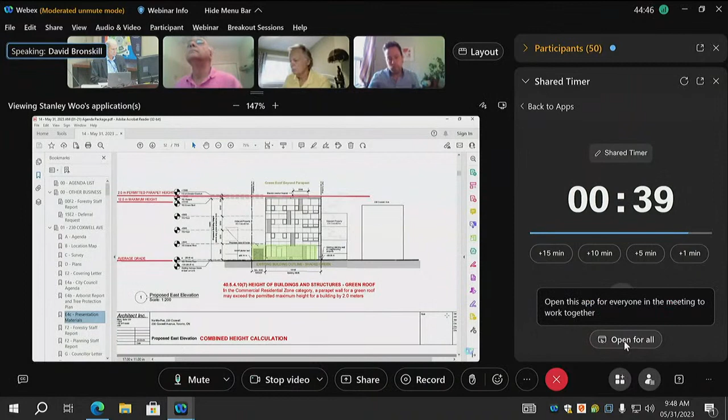There is a height variance. We think it's in keeping with what's existing on the street. We're simply noting that although there's a maximum permitted height of 12 meters and we're exceeding that, going up to 13.26, you can see there's a parapet height projection permitted for 2 meters. So in fact the street wall could be up to 14 meters. We are below that, and we are providing a green roof. So in terms of that overall height...

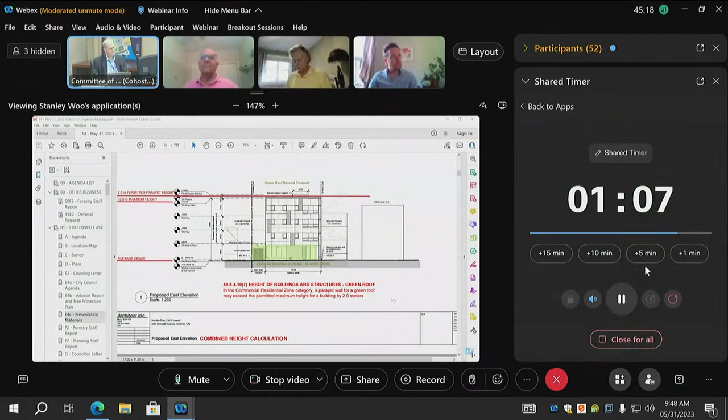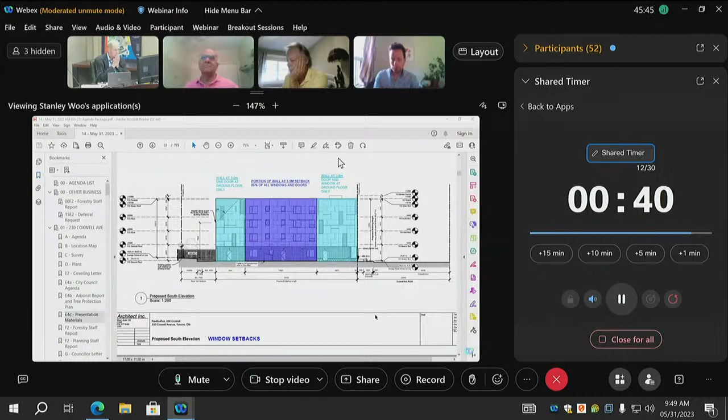The next page, page 6, shows another one of the technical variances. You're supposed to have a 5.5 meter setback on a wall where there are windows. Page 6 in dark blue shows the area set back 5.5 meters that has windows. The light blue is set back 3 meters, but on the left-hand side there's only a door, so no windows on the ground floor, and on the right-hand side a door and a window at the ground floor. So again, we think the intent of this provision is being met.

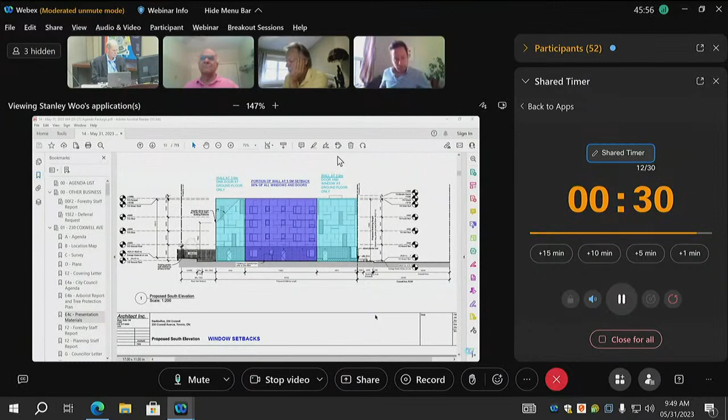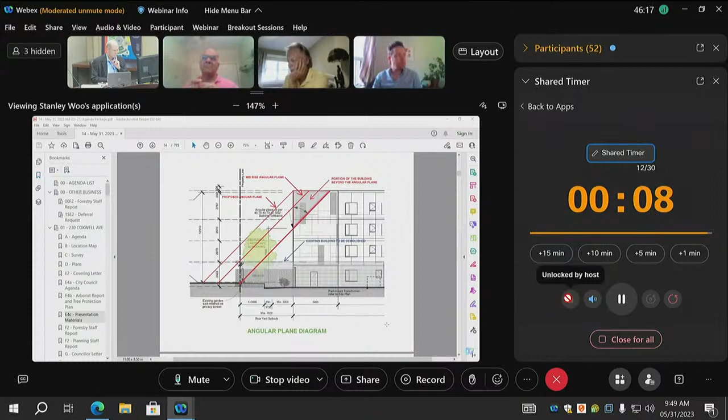Finally, Mr. Chair, page 7, we're showing an angular plane diagram for the committee. We have a penetration there in the dark gray. I wanted to draw your attention to the middle red line that we drew on this. That's not a zoning standard, that's the existing mid-rise angular plane. So when you're doing a mid-rise building on major streets, that red line is what you're supposed to meet. We know that angular plane is in fact being taken away through recent city staff initiatives, but you can see the small extent of penetration into a very standard urban design guideline for angular planes. Thank you.

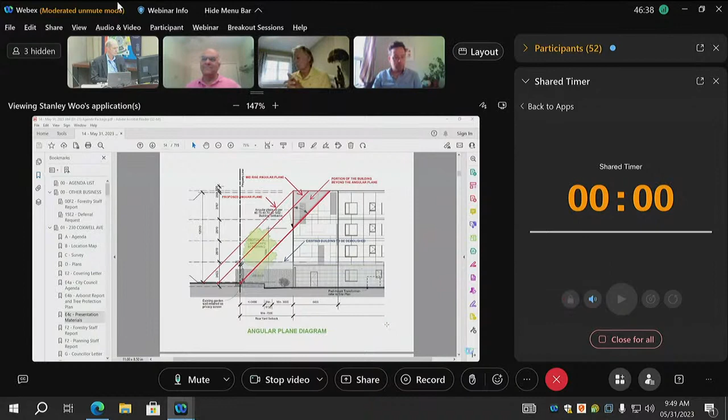Okay, thank you. Panel members, I gave that speaker an extra minute because we have 10 speakers registered to speak in opposition, so I just wanted to get as good a picture of the application as I could. Are there any questions for the applicant or the agent at this stage, panel, or shall we go ahead and hear from those in opposition?

Let's go ahead to the first opposition speaker. We'll ask the opposition speakers, because there are a number of you, to please be careful not to repeat what those before you have said. There's no need for that. But we are interested in how the application concerns you and the impacts you see it having upon the neighborhood and upon those like yourselves who live nearby.

First speaker, moderator. Hi, Shu. You've been unmuted, and you can turn on your video if you want. Before you start, hello everyone, can you guys all hear me? I beg your pardon, your voice is a bit faint. Can you all hear me? You're faint, no, we're having trouble.

Can you guys hear me? Hello? We can hear her, Chair. Hear him, Chair. Now we hear you here also. Good, okay, okay, so I'm clear, you guys can hear me. You're clear, okay, and now you're loud. Yes. Okay Stanley, could you share my material on the screen? I just need the first page before you start counting. Yes, that's the one. Okay, can I start? Please go ahead.

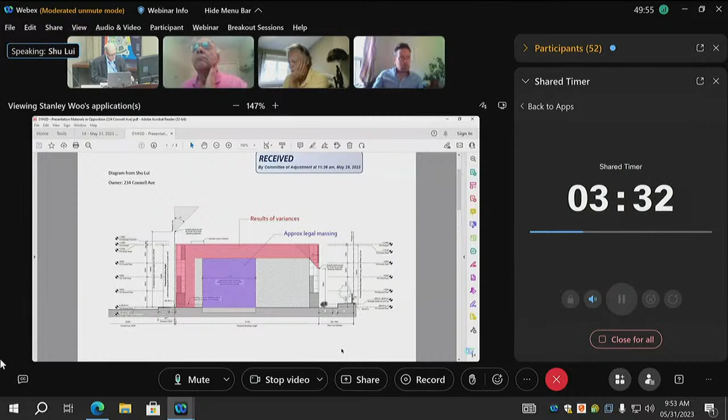Number two, fire hazard. Since I have 5 vents on the southern wall, 3 dryer vents and 2 kitchen vents, they have no respect for any setback between my building and the front. Therefore, as a result, those vents will stop working, and I won't be able to maintain them. All the residents in my building will be at risk of carbon monoxide poisoning, as well as risk of fire for both of our buildings.

Number 3 is structural integrity and accountability in the long term. As the geotechnical report states, it will be extremely difficult to build this close to my building, and the soil condition won't be able to support their 4-story building with conventional construction. This is no news to me, because if you live in the neighborhood and know it, this intersection has been troubled by foundation and structural issues due to the soil condition.

For example, up the street, the No Frills and GoodLife Fitness both have had structural issues in the past and recently. No Frills was a bit extreme, they had to be completely demolished and reconstructed because the building was basically collapsing on itself after some time. So this tends to happen to denser buildings, and that's all we know, imagine what we don't know. I think in this intersection, any building asking for variance, adding weight and density to their building, should be automatically refused, especially when it's this close to my building.

If something happens, I'm going to be dragged with it in the short and long run. So the last item would be my airflow and views will also be impacted.

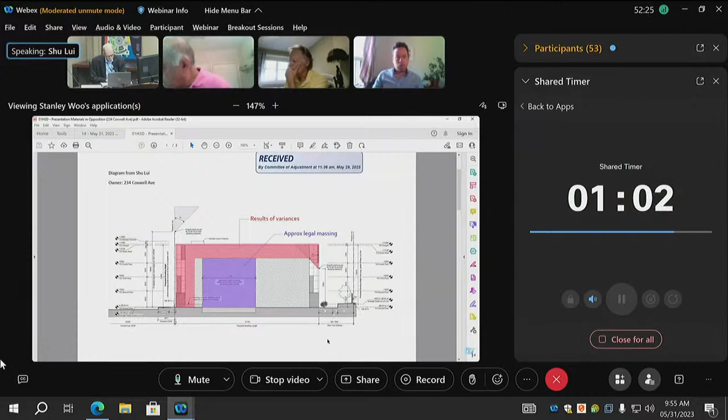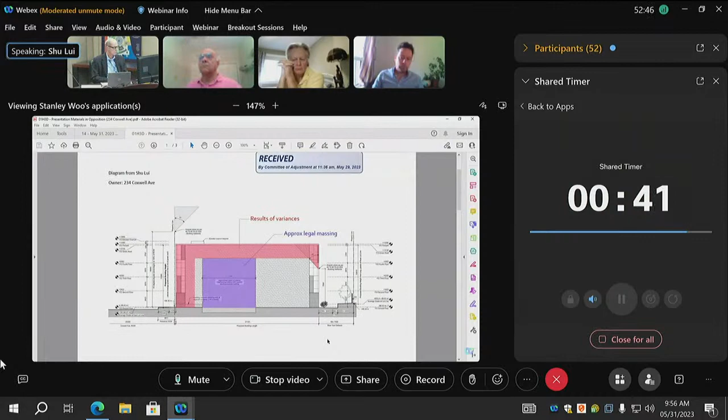A few days later, they called me and told me they don't care about my concerns. Not only that, they are asking me to completely reroute my internal ducts and vents to suit their variances in design, which I think is absolutely unacceptable. This is disgusting. I hope the panel can see that their marketing material, and what their friends say about them, promotes them as neighborly, responsible, and collaborative. But when you look at their actions, they have been completely the opposite — aggressive, irresponsible, and dishonest.

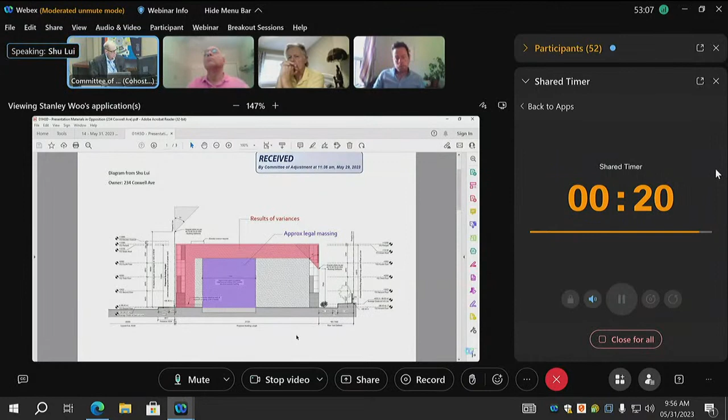I hope the panel can judge this proposal by what they do, not by what they say or what their friends say about them. I don't want this to degenerate into a personality issue — we're dealing with the variances in the application. So I'm brief here, but I have stated in detail in my letter why I think these variances should be refused.

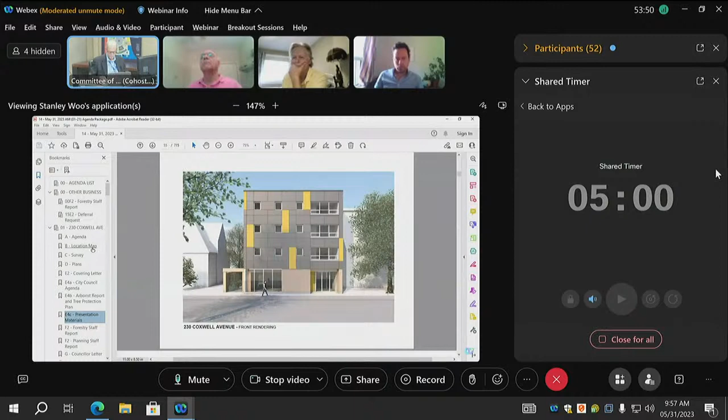Hi Abbas, you've been unmuted. Thank you, can everyone hear me? We hear you clearly — you have 5 minutes to present your concerns. Tell us about the impact you're concerned about. Thank you. My name is Abbas Asuji, and I'm a resident of 234 Coxwell, the property directly adjacent to the variances being requested today.

Affordable housing is undeniably an issue in our city, and I fully acknowledge the importance of addressing it. However, I firmly believe that any development, including this one, must be thoroughly thought out and involve meaningful consultation with the immediate neighbors. Minor variances, especially bundled in the quantity requested today, can completely change the scale of the development and cause permanent consequences for those living in close proximity.

Today I want to bring your attention to the glaring lack of consultation and the hasty variance request process for this development. I was surprised that only on May 7th were we made aware of this development, through a letter from the city. As someone living right next to this property, this shows a very clear lack of early engagement. Usually with such developments, developers give significant notice to avoid these types of surprises. It is normal for developers to consult with neighbors well in advance so they can understand and evaluate the potential impacts on the neighborhood. But this clearly wasn't done in this case.

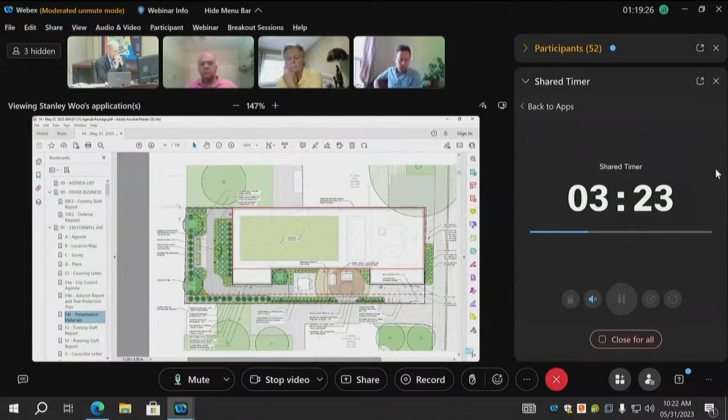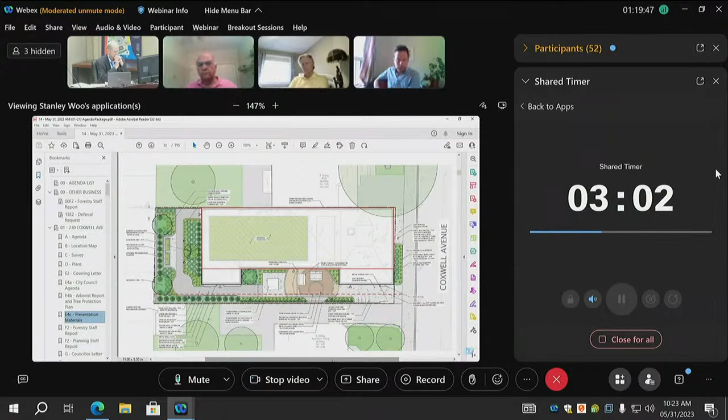In terms of how the building will function, there were some comments about that. If staff could pull up page 3, the colored landscape plan — you can see the 3-meter setback to the front portion of the buildings on the side to allow the pedestrian walkway, where there's only the door and window at grade. Then the 5.5-meter inset, where there are windows in accordance with the zoning bylaw, and the bump out again at 3 meters where there's just a door. There's a landscaping strip to the property to the south, and a 0-meter setback to the building to the north. I'll speak about the vents in a moment. It's a very well designed and coordinated site plan with landscaping buffers, particularly to the property to the south.

The next page shows the ground floor plan, since there was a question about managing traffic to the building. In terms of pedestrian traffic, it's managed as any other residential building is managed — there's an entry vestibule, a main entrance, a lobby, stairs and elevators, and residential units that people will live in. So I'm not quite sure what that speaker was suggesting in terms of managing the occupants. They are residents of this building the way any other person is a resident of a building in the city of Toronto.

There was a concern about bicycle parking. You'll note on this plan at the bottom left, the bicycle parking room. The variance before you doesn't relate to the amount of bicycle parking — it relates to how they are stacked, i.e., whether or not there's a mechanical device used with stacked bicycle parking spaces. So there is bicycle parking.

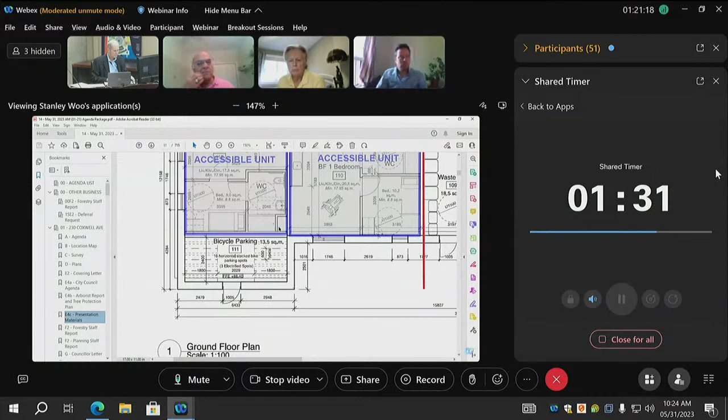Let's just zoom in on that for a second. Okay, there it is — 16 horizontal stacked bike parking spaces, 3 electrified spots in a bike room. The amount of bicycle parking is as required under the zoning bylaw; it's just that the stacking doesn't have a mechanical stacker. So it's a very technical variance, and I would hope in a building that's going to be affordable housing, that's an area where we might have some flexibility.

There was a question about garbage. If staff could scroll a little to the right, you'll see the waste room that would store the garbage the way any other apartment building would have waste stored inside.

It could then be brought out to the curb through that pedestrian walkway that I showed you earlier on the landscape plan, out that door, and brought out to the street for typical public pickup.

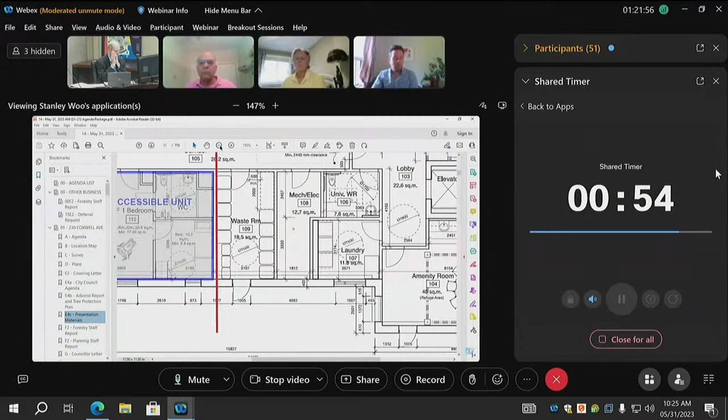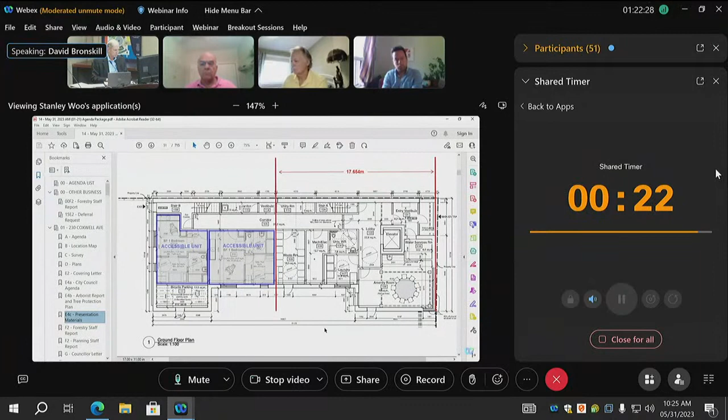In terms of parking, the only variance before you is for one accessible space. That's the only variance; no other parking variance is being required. It's simply that on this site, providing an accessible parking space would be very difficult to achieve on the lot. There is parking on Coxwell, so I'm not quite sure what the statement was to the committee about not being able to park at all on Coxwell. It's designed that the accessible units are at grade, so someone who needs to get there with a car would be able to be picked up, go out that walkway to Coxwell, and if they needed assistance, they could be picked up.

I'm not going to spend any more time on the consultation, Mr. Chair, but the one neighbor to the north with the vents, I don't think he was fair or accurate in the conversations. In fact, I think he bordered on being unfair. Our client has offered to move his vents. His vents, in fact, are built over our client's property. That's a problem, but it's a problem of his own making, and we will work with him through the construction process to deal with that. In fact, our client has already been working with him, assisted with his roof a number of months ago through the builder, helping him move materials onto the roof. So he's known for a long time about this development.

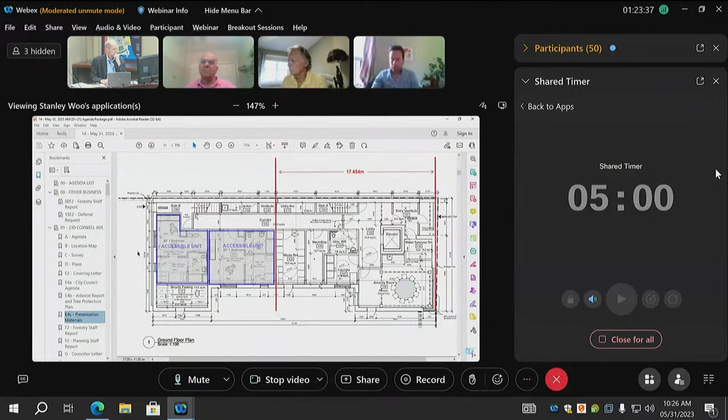And there was a concern also about overlook that I would deal with quickly. There's no rear yard setback variance being proposed, so the windows are located exactly where they should be for a building like this, and I'm not sure why any of the eventual residents in this building would pose any different privacy impact than that permitted by the zoning bylaw. I hope I've addressed all those comments, but I'm available for questions.

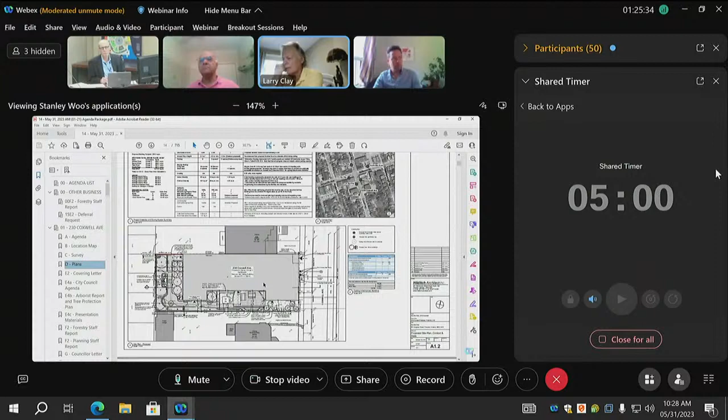Thanks, Chair, and thanks, David. A very helpful presentation. Looking at the site plan, it looks like there's a substantial amount of landscaping and vegetation proposed for the rear yard. I'm also looking at what looks like a reference to a garden wall and, in some cases, privacy screening. Could you help us understand what the plan is for the treatment, and is there any screening in and around the backyard?

Thank you, through Mr. Chair, it's on page 3 of our presentation, maybe the most helpful landscape plan to see. It's a very typical backyard type of proposed condition, although more landscaped, because there's a path that comes down the side. There is then, in the side, an area for seating in that 5.5 meter setback. It then becomes a path that accesses the two accessible units, and you can see those triangles indicating those two access points. There is then some planters and other landscaping at the back, including new proposed trees, planting, and hedges. There are also fences and privacy screens proposed that would be in accordance with the city's fence bylaw. So we think it's an appropriate rear yard condition; it's intended more to be accessed than congregation space, but it does have heavy landscaping as well as fences in accordance with the city's fencing bylaw.

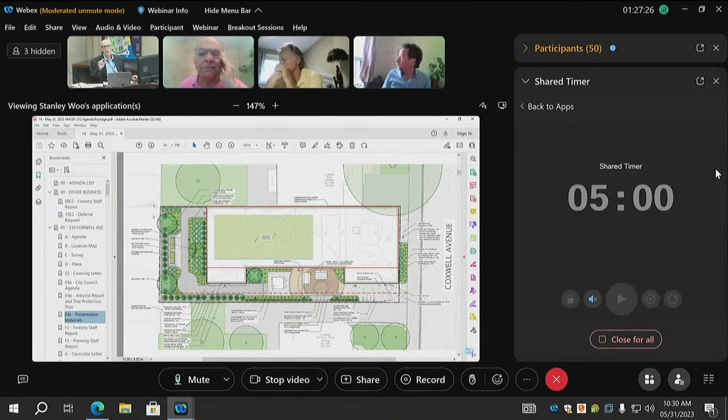You're not expected to, but I just thought, because there are a lot of concerns about the number of units in the proposed structure, but 2 doors up you've got a pretty substantial structure right there. Yes, there's also an interesting one, and I can't tell whether it's just a duplex, but at 234 Coxwell, it's a 3.5 to 4 story massing. It may not have the same number of units, but interestingly it's a more imposing massing, I would say, than 230 Coxwell, although permitted quite clearly. It may not have the same number of units as 230 Coxwell because you see those 2 front doors, and I can't tell again whether that's a duplex, fourplex, what's in there. But again, just the type of varied multi-unit 4-story built form that's on Coxwell.

And if I may just also observe, it's one of those things I'm observing in terms of relative situations. The 234 is also built from lot line to lot line, from the north side and south side. Correct. I thank you so much for your response. Thank you, sir.

Okay, then panel, if there are no further questions, let us take this application into committee. And we can move toward a motion and have some discussion in advance of that if you'd like. Mr. Byatt, go ahead, we're now in committee.

I'll just start off with some comments, Chair. Again, I'd like to thank Mr. Bronskill for a very good presentation, as always. I think this is an extremely important project and extremely well thought out in terms of the layout and design of the project. I do appreciate some of the concerns that people in opposition have expressed. Some, I think, may have some validity to it, others I'm not so sure. However, I certainly think this is an excellent project, for the area in particular. So I'd be quite in favor of approving this project without any conditions, except for forestry number 3.

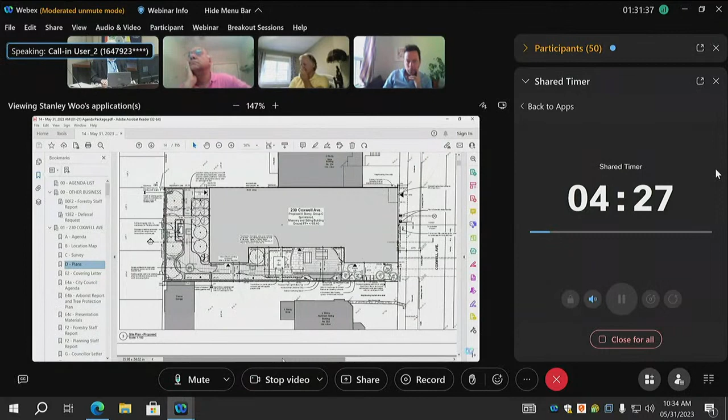So one will be privacy. Right now, we participate in our backyard, we open our windows in our backyard or within our homes. And with this four-story complex, it makes us very uncomfortable continuing these activities, and it will force us to live within our home and sort of shut out the backyard. From a sunlight perspective, the shadow study, when you look at the sunlight, it removes the morning light completely.

The shadow study was completed for March and September, but from a gardening perspective, most of those activities actually occur between May and August, which are the longest days. If you look at the sunlight, most of the morning sunlight with the four-story up until noon, 1 o'clock, will be removed, so we will not receive any of this morning sunlight.

This has a negative impact on our health, such as our mood, mental, sleep, and immune system, family bonding activities, growing food in our gardens, as well as bacteria, which the sun kills bacteria in our homes.

When I think about the different studies on the application, there were 4 studies that were waived but are critical. This includes the parking, traffic operation, geotechnical study, and the hydrological review. Details are in my letter, but given this proposed study, I'm not sure why these were waived. They are critical and they should have been submitted.

The applicant had sufficient time. Their geotechnical review was completed 3 years ago, so there's absolutely no reason why any of the studies should have been waived or not completed.

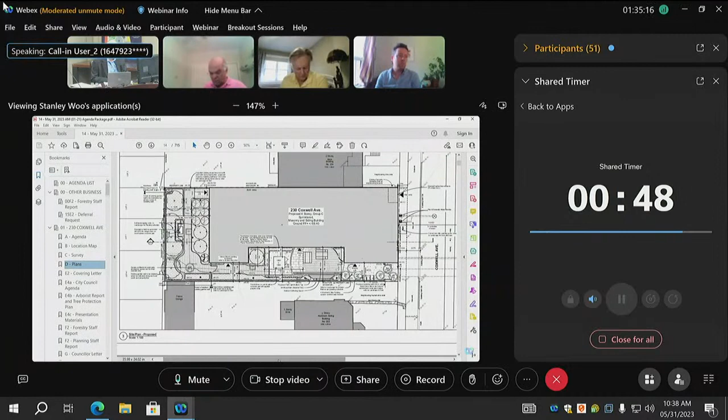Our community, after talking to a lot of our neighbors, we all believe helping others is important, but we want equality, respect, and consideration for existing community members. Our needs should not be secondary. Our home is our sanctuary. It is a place where our family comes together, and it is a foundation for our health and well-being.

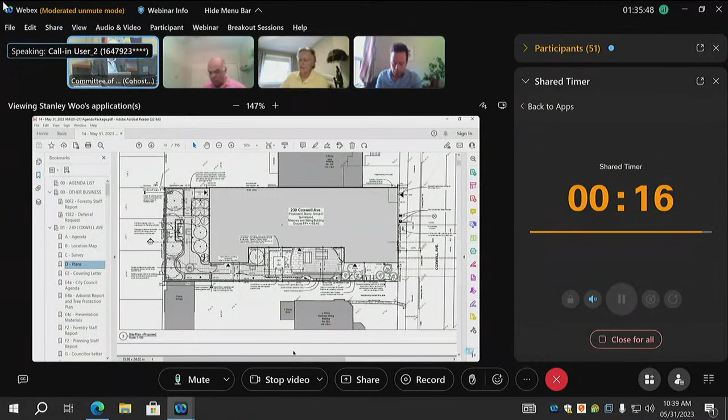We just want to make sure that the health and well-being of our neighbors and community are considered, and that this building stays within the rules that are in place.

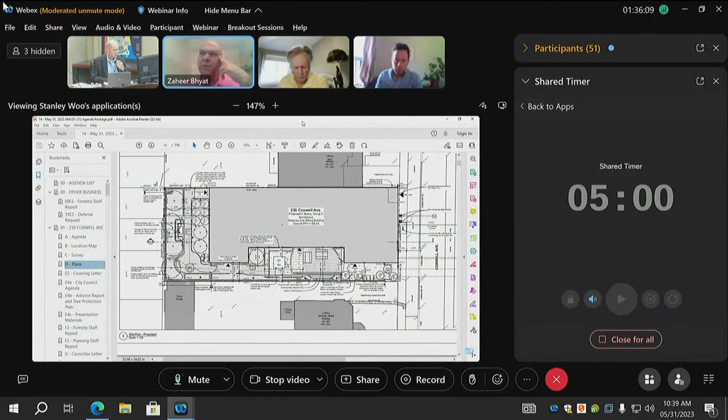Mr. Bhyat, go ahead. Just one quick question to the person in opposition: from a Google image, there appears to be very large trees in your backyard. Is that correct? That is correct.

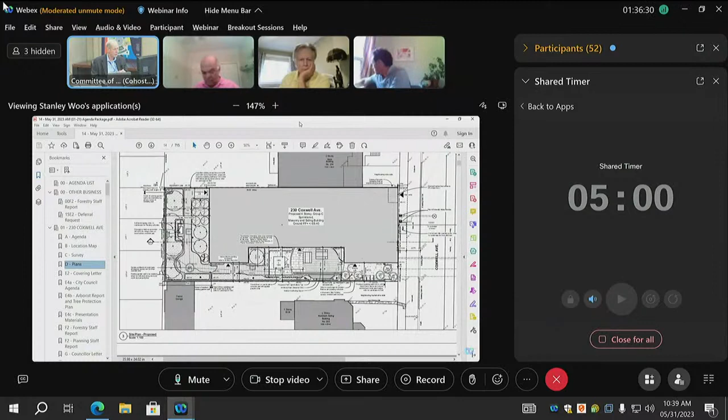First off, I just want to thank everyone who wrote in, both for and in opposition, and who called in today. I want to assure everyone that we read all the material, and we certainly listened carefully this morning.

Having said that, I agree with Zaheer. I think this is a commendable project, and I look at the variances before us, and overall I find them to be relatively minor. The only one that originally gave me pause was the height, but Mr. Bronskill pointed out, rightly so, that the permitted height is 12 meters plus an allowable 2 meters for the parapet. So in effect, this is lower than it could have been as of right.

I do note that from an overlook perspective, there are no balconies. There is no rooftop amenity. The amenity space is on the ground floor. And as Mr. Bronskill pointed out, while it will be used for some type of recreation, it really is passive, and it appears to be appropriately screened from the neighbors. So I think that's a good thing.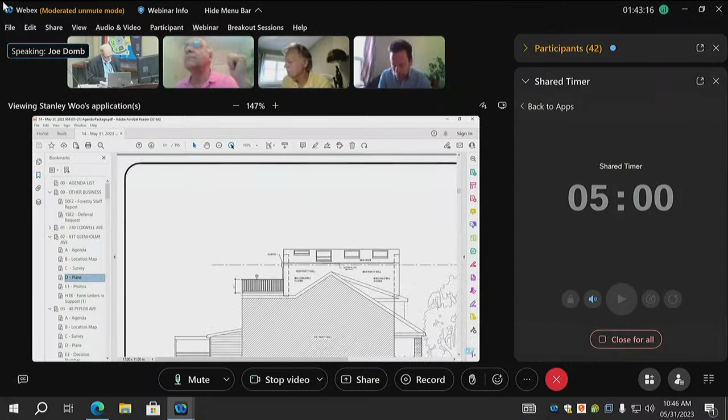Okay, then any questions for the agent panel? Mr. Bhyat, go ahead, just a quick one. I was trying to figure out if the deck on the 3rd floor is fairly large, but it looks reasonable within the context of the extension. I just wondered about the height of the side screening, the side walls of the deck. Yes, the height, I believe it's on the elevation here, that would be 1.07 meters. I think it may have an overlook on one side, if I'm not mistaken, or perhaps both sides. I can't quite figure out that one.

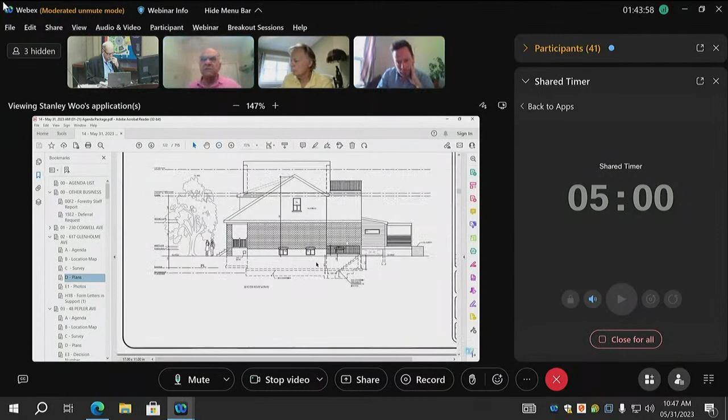It does have an overlook on both sides. However, the attached semi, it's onto the roof of the 2nd story, so you may not have as much of an overlook on one side. Is that right? Yeah. So I wonder if on the side that really might matter more, the side of the deck could be raised to 1.5 meters. Yes, privacy screening would be acceptable. Thank you.

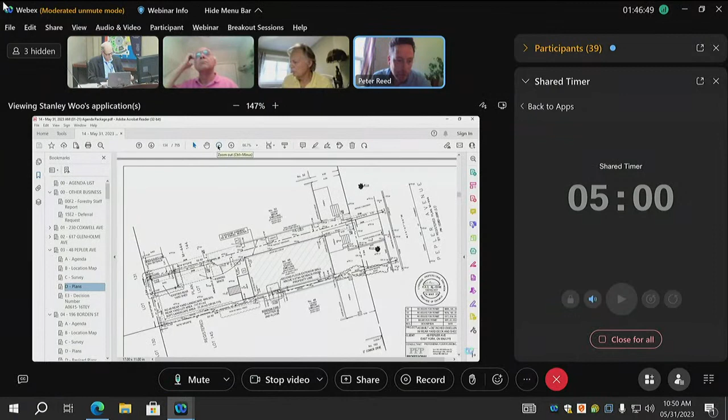So, yeah, I mean, no, I understand that. I'm just saying that the south edge of the deck is pretty close to the southern neighbors, and I think some privacy screening might benefit both the homeowner and the neighbor to the south. Is that okay with you, or would you have concerns? Of course, it's okay if the committee looks into that.

But I mean, I don't believe it's required. It's not on the second story. It's not having a height, but it's fine. If the committee wishes to add this as a condition, it's fine with the owner. Thanks a lot.

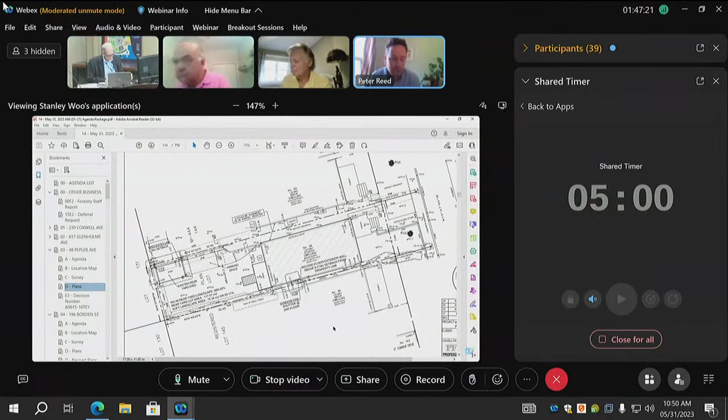Anyone ready to move forward toward a motion? Mr. Reed. Thanks, Chair. The reason I bring that up is just because the deck is raised slightly off the ground, so I think there is some potential for overlook. I think the variances being requested are minor and really have minimal impact. I move approval subject to the south side of the ground floor deck having screening to 1.5 meters.

Thank you. That is seconded by Mr. Bhyat. Moved and seconded to approve. Those in favor, please show of hands. That vote is unanimous. Motion carries. Application is approved. Item number 4 is 196 Borden Street.

Before us are those materials submitted at application, revised plans May 24 and May 30, photograph of comparables, correspondence May 24 from the agent, from the applicant May 24, a zoning map from the applicant May 29, email correspondence from Community Planning May 30th, staff report from Community Planning May 29th. There is opposition correspondence from Harbord Village Residents Association, from 194 Borden, which would appear to be next door, and 192 and 190 Borden, also opposition correspondence. Okay.

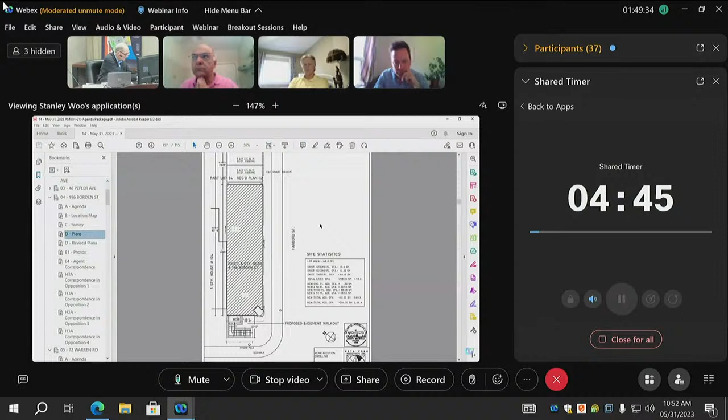This proposal is for an addition to an existing building at the rear. This infill will occupy the gap between the existing buildings and so be an important improvement to the streetscape. This continuation of Victorian-style facades will complement and enhance the street. Our variances are minor in nature, and so are consistent with a previous similar approval, a Committee of Adjustment decision at 165 Brunswick Avenue, and you'll find that under the linked document.

This is one block away. Please see it in the file. It was approved with 9 variances similar to ours. It is my opinion that this addition meets the 4 tests: it is minor, desirable to the streetscape, and within the zoning and official plan. Also, it is encouraged by the city for residential infill.

And it is supported by the city planner. The city planner does not object to this proposal, and he has made a recommendation as well. We have no height variance, and in the file you'll see a similar 4-story building that was built a few years ago nearby, about 2 blocks away. We ask that you approve this application as it is a reasonable and appropriate improvement to the neighborhood and the streetscape. Thank you.

Any questions, panel? Okay, we'll move along then. We have some speakers. I'm just going to check with the moderator. How many speakers are you showing at this stage, registered and standing by?

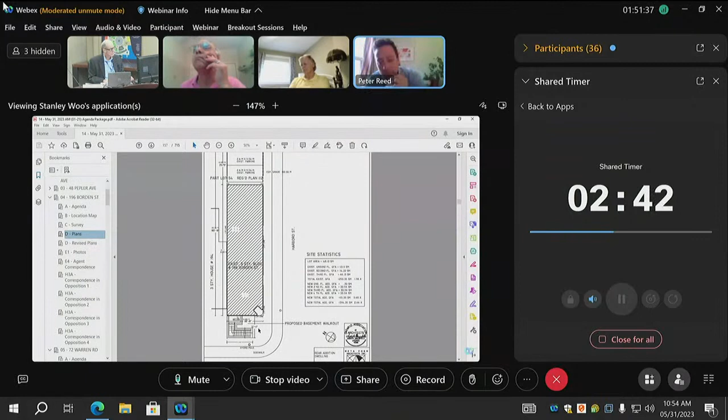Let's have the first speaker. Actually, sorry Chair, this is Peter, I do have a question for the applicant. Oh, go ahead. Thanks. Just to the applicant or the agent, I'm aware that you sent in revised plans and we've reviewed those, but I just wanted to check if any of the variances have changed as a result of those plans.

Like the FSI, maybe for variance 1, is that still the same? Well, with the planner's recommendation of infilling the ground floor, the coverage would increase. Yeah, so I'm just worried that variance is going to be higher than what went out in the notice. So could you just look at the variances and tell us which ones are changing from your list, please?

Well, I'm not certain, but the coverage I think would increase to 2.89, and there might be also a variance on the parking.

Well, we have to get this down very clearly, because otherwise what the panel will be voting on is the application as distributed to the public. And that's what we'll be voting on, and if we happen to approve it, that's what would be approved. So Mr. Reed has raised an important question. If any of your 5 variances have changed, we need to change them for the record, because that's how you would want them to be voted upon.

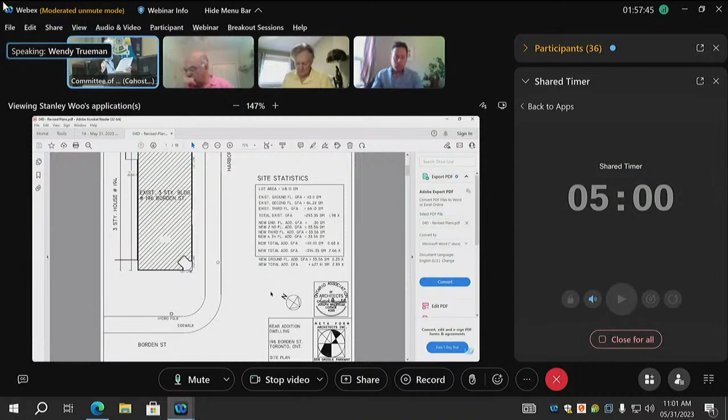Okay, and do we have one more standing by, moderator? Hello, Joshua, you've been unmuted. Yes, can you hear me? Clearly, yes, good day. Great. I'm in favor of a deferral as well. Yes, please, a deferral. Thank you very much for that.

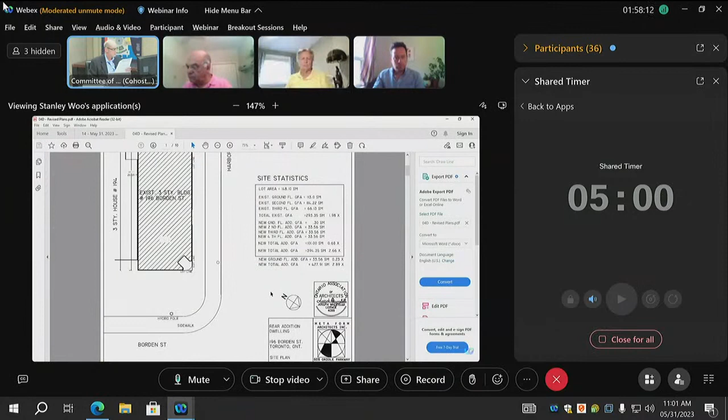Okay, we can now return to the panel. Panel will take the application into committee and we can discuss or move to a motion with respect to this issue of whether or not we want to defer. Any thoughts? Anyone ready to move to a motion?

Mr. Reid, go ahead. Thanks, Chair. I think it's pretty clear that we have to. Variance 1 will change, plus I think there'll be a new parking variance involved. So I move that the application be deferred for recirculation.

Very good, seconded, Mr. Clay. Moved and seconded to defer. Those in favor, please show hands. Vote unanimous, motion carried, the application is deferred. Thank you, panel, and thank you, speakers.

Okay. With that, the panel moves on to number 5, 72 Warren Road.

Here we are looking at those materials submitted at time of application. Revised plans submitted May 26 and 30. Revised zoning notice, redlined public notice. There is a previous Committee of Adjustment decision from 2021. And there's a cover letter from the agent. We have correspondence from Transportation Engineering and Transportation Services, and a staff report from Urban Forestry.

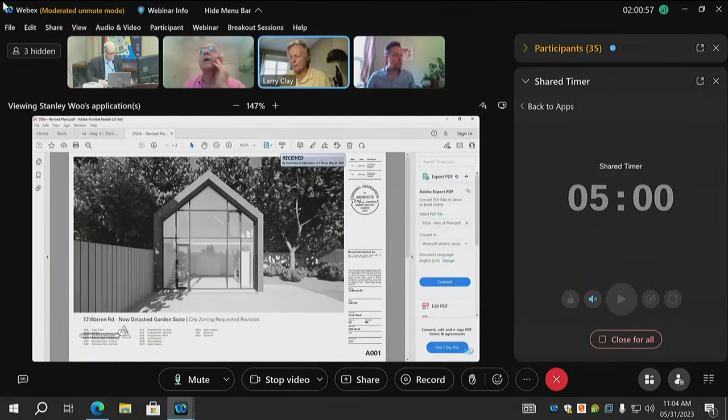We can, let's just, maybe we could just get the agent to confirm there's been a redline version. It looks like there's been a change that removes the variances with respect to bicycle parking and parking spaces. So can we just confirm that with them? Let's get the, yes, if you could, agent, just give us the background to what Mr. Clay is referring to, the removal of those items. How did that happen? What's the rationale there?

The C of A technician just advised that we could easily remove, it's pretty obvious, we could just locate those parking spots on the driveway that extends into the backyard. So we just added the annotation on the site plan to show where the bicycle and vehicular parking is, so we could remove those. Okay, so that's variance 7 and 8, right? So 7 and 8 are gone? That's right. We didn't make any changes to soft landscaping, it's really just simply adding lines, an annotation to the drawing.

Okay, but for the record, we are dealing with the application with variances number 7 and number 8 deleted at the applicant's request. So we're dealing with 6 variances.

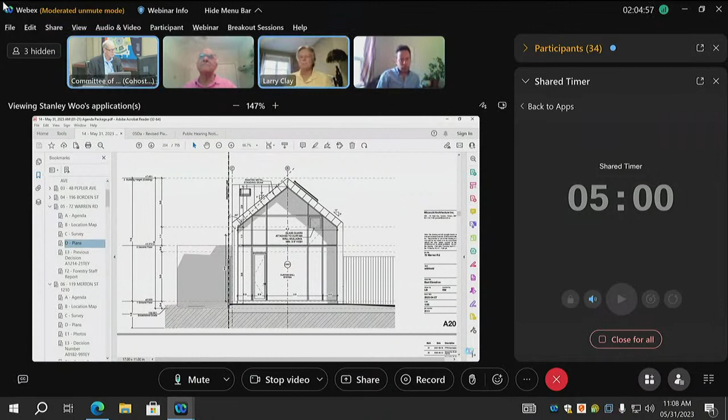Mr. Clay, go ahead. Thanks, Chair. I too was originally concerned a little bit about the height because it does exceed what the permitted height is for garden suites, but I think the applicant's correct. The lot fabric in this area is really quite large, and I think the lot can quite capably handle the extra height. I thought it was a rather handsome design for a garden suite, actually, so I think it'd be a good addition to the neighborhood. The variances, with the exception of the height, are really quite modest, and as the applicant points out, this was approved for roughly the same thing a year ago. I know Peter was on that committee, so I think it's a supportable application.

I'd like to move approval subject to forestry condition number 2. That is seconded by Mr. Bhyat. As amended, Larry? To the Chair, as amended, yes, deleting variances 7 and 8. There's a motion to approve the application as amended. Mr. Bhyat, you're seconding? Yes, sir. So it is moved and seconded to approve the amended application. Those in favor, please, show of hands. Vote unanimous. Motion carried, and the application as amended is approved.

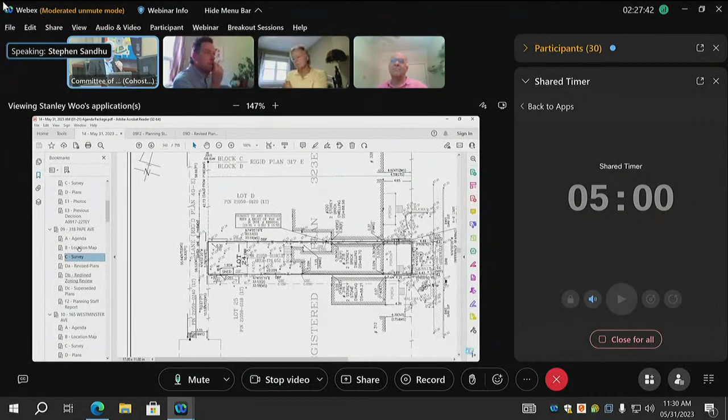Well, I'm going to give you the opportunity here, owner, do you wish to delete number 3? Absolutely, we would delete that height variance then. Okay, so for the record, we are deleting minor variance number 3 from consideration. It's no longer on the application. If we were to approve the application, variance number 3 is deleted.

Absolutely. Any other questions, panel? My indulgence for one last question. Go for it. Is the setback from the center line? So it's just a very modest change from what's permitted. Would that be in line with the other garages along the laneway on your side?

I would have to let the designer and agent speak to that. I am not 100% certain, but I see it's a very, very minor variance. Well, let's go to the agent then.

Hi, Sarah. Hello, Sarah. We've had some difficulty connecting with Sarah before and appear to be having it again, but it is extremely minor - it's 0.03 meters. Yeah, I think Sarah is trying to connect.

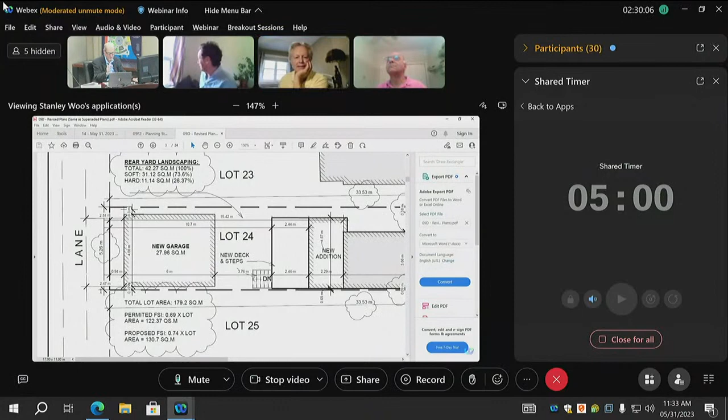Is there any other variances you plan to remove? I don't believe so, no. Oh, okay. So for the record, variance number 2 is being deleted at the applicant's request.

Panel members, we're now dealing with the original application minus numbers 2 and 3. So we're dealing with 4 variances as they were originally circulated. That is the application as amended that the panel has before it.

All right, then. Panel members, if you have further questions for either the agent or the owner, otherwise we can go into committee on this application.

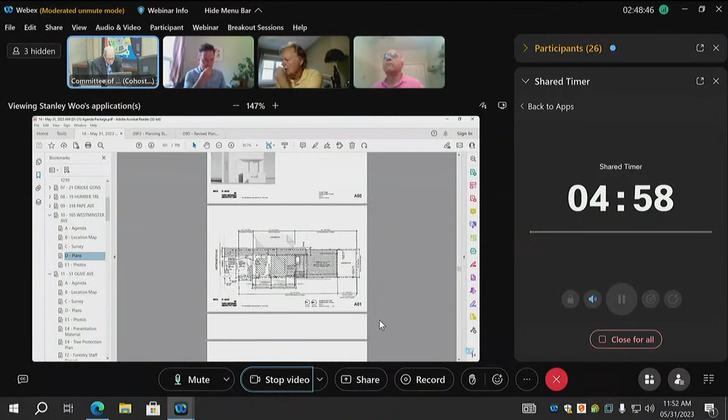Yes, so just to note, the owners for this property are looking to convert a coach house workspace. It's currently a 2-story space in their backyard into a garden suite. So many of the notes on minor variances, such as the setbacks and height, are all for an existing building which isn't grandfathered in as a garden suite. So just looking through the items here, one moment. The height or the 45-degree angular plane is not met because it's an existing 2-story building. You can look at the photos entitled E1 photos to see photos of what's currently existing, which shows a 2-story brick structure. That's most of the points from 1 to 4 there, including the height.

Doesn't meet the height, slightly over. And I want to make a note on the side yard setback. That's referring to not the house, but a new porch structure, which is replacing the existing porch structure. That's keeping the same setback of what is currently existing. The intent is to rebuild what is currently existing at the porch, at the front of the house, facing the main street on Westminster Avenue there.

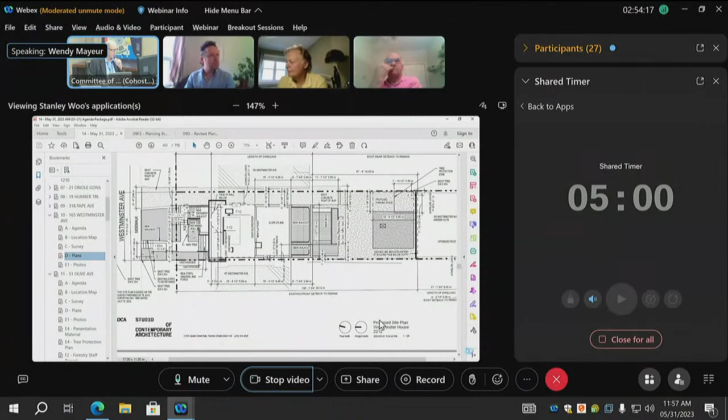Okay, let's go back to the agent, who will have a chance to respond to Wendy's main concern, which was with respect to privacy, screening, and overlook. Agent, you have an opportunity here to talk to that.

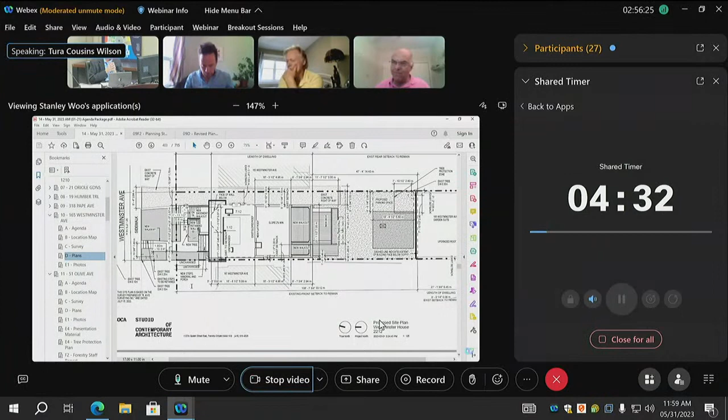Thank you, Wendy, for your comment. One thing I want to note is the addition to the main house is not part of this application—that addition has already been approved by zoning and permits. The construction of the terrace is currently underway, and this variance is for the garden suite and the exterior walkway to the front. That being said, Wendy, my understanding is that the new owners want to be good neighbors and would be happy to speak with you about any privacy concerns you may have. Regarding the draining, the intent is to drain all within the property of 165 Westminster.

Okay, now something I picked up on there that was new to me is that you're mentioning there is some construction underway. So do any of the variances we are looking at this morning relate to work that has already been done and constructed?

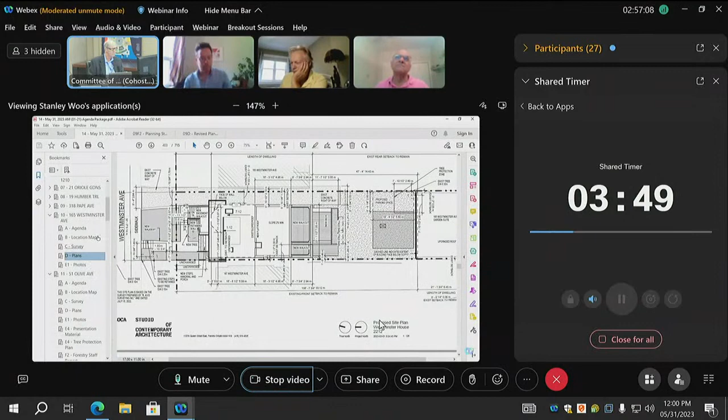No, not at all. The variance for the garden suite is to change the use, to turn an existing two-story workspace garage in the back of the property into a garden suite, with the intent of providing additional housing in the neighborhood. The work to the main house, which is underway, has already been approved in zoning and permitting. And then there are a few minor variances to the walkway and front porch at the front of the house.

Okay. Let me see if the panel has any questions for you. Panel members, questions for Mr. Clay first, Mr. Bhyat second.

You've already heard the chair allude to the concern in the rear yard—I think it's fair to say we all probably have that same concern. You mentioned you'd be adding a little soft landscaping relative to the existing condition, but it seems like there's an opportunity to do an awful lot more. That asphalt or concrete back there is in horrible condition and could and should likely be replaced. If you're already doing construction on an addition to the main dwelling, it seems there's an opportunity to pull that concrete and replace it with soft landscaping. In fact, I suspect if you did that, you wouldn't even need the soft landscaping variance.

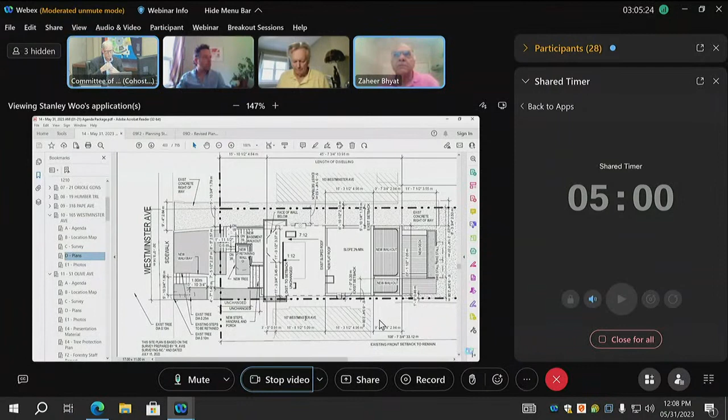Very good, any other questions, panel? Mr. Bhyat? Yes, Chair, I won't repeat any of what's been said. I'm just looking at the purpose of the application, because it's talking about alterations to the existing three-story detached dwelling, but all the variances seem to apply essentially to the garden suite or ancillary building. I'm just wondering, is there a need to alter the purpose at all?

In response to that, the only alteration to the existing dwelling for purposes of this minor variance is the front porch and basement walkout. Everything else pertains to the garden suite. This might be a holdover from the examiner - originally it was all clumped together, but because the house renovation could be approved by and large, we separated the minor variance of the garden suite out.

Thank you, but I was just wondering, because when you look at the first sentence in the purpose, it does talk about the rear second and third story balconies. So if that's in the purpose, when we talk about side screening for the balconies, could that not be something we might end up saying is a condition we'd like to put in? As you heard, the neighbor is concerned about that. Yes, the balconies aren't a specific condition addressed, but I think that could be something discussed in terms of how to amend any privacy concerns.

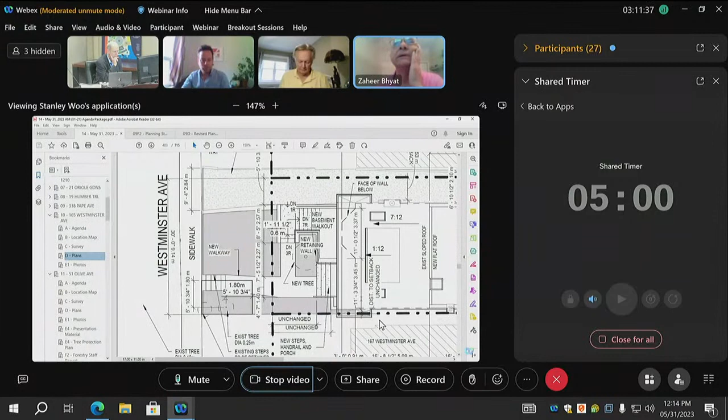There's the basement walkout coming up, and then there's a walkway across there. Can we zero in even more on the front? Very good. Okay, so the permeable pavers are, Mr. Bhyat? I'm just trying to see where it is. There's an existing walkway to be demolished, and presumably that's going to be replaced. And if so, that would be it. And there's a walkway to the new basement walkout.

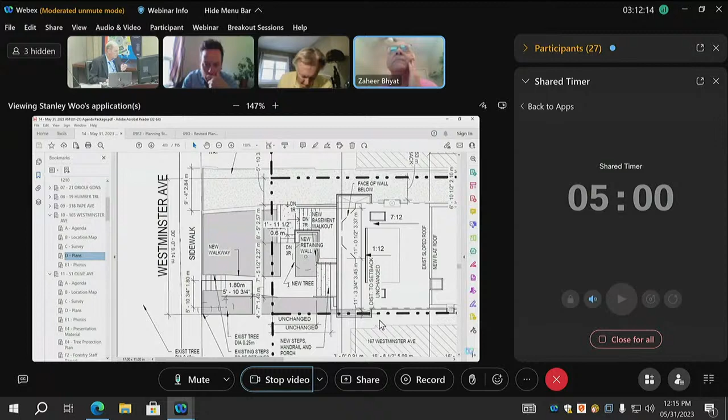Perhaps we should just check with the agent to find out which areas he was referring to. It's the retaining wall, existing porch steps and handrail to be demolished. Okay, let's go to the agent. Agent, you can rejoin us now, please.

Hi, Tura speaking. It's yet to be determined. I think it was the intent to potentially appease any concerns that it's slightly under permeable pavers, but I think the walkway between from the front porch to the basement walkout could be explored as permeable pavers. Well, we're going to make it a condition that that's what we're discussing. Understood. Thanks.

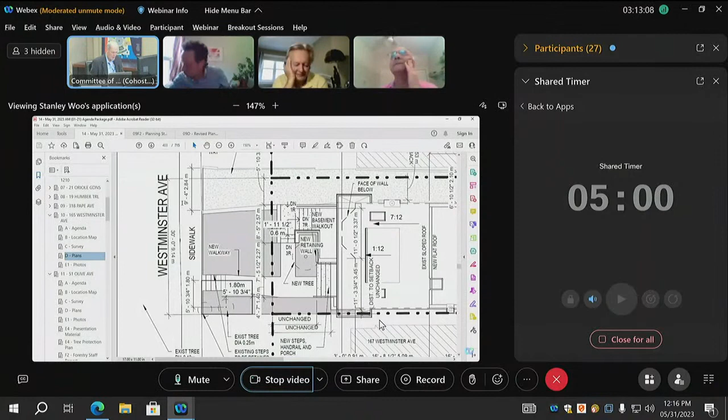Yeah, and just to also add, I know there's back and forth, the second floor, it's the west side. Second floor is west. Yes. Okay, sorry, Larry. Okay, it's west privacy screening the second floor, and the walkway to the new basement walkout permeable. I think we have it now.

All right, is there a second for that motion? It is seconded, Mr. Reed. So it is moved and seconded to approve the application as amended. All those in favor, please show of hands. And that vote is unanimous. It carries the motion, and the application as amended is so approved. Thank you, panel.

Number 11 is 51 Olive Avenue. Here we have the materials submitted.

We have photographs of trees on the property. There's a tree protection plan. There are presentation materials from the agent, May 24th. We have a staff report from Urban Forestry. We have correspondence, both supporting and opposing.

In support from 768 Palmerston and from 53 Olive Avenue, which would appear to be next door. In opposition from 790 Palmerston, from 52 Olive, and from 41 Olive.

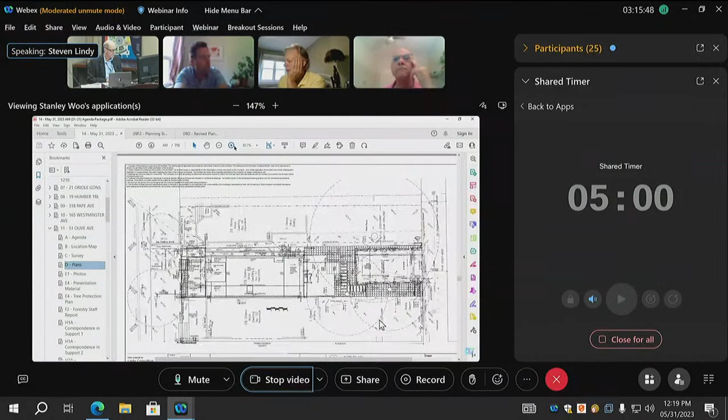Yes, as we can see from the site plan and the survey, the front yard is very small. The front yard consists predominantly of the porch. The balance is a strip of soft landscaping and stairs and a 1 meter wide porous walkway to access the side and rear of the house. The 32% landscaping calculation includes soft and porous paver landscaping. The proposed porch is simply a replacement of the existing porch. The landscaping will absorb the rain adequately within the property. In addition, we are proposing extensive soft landscaping in the rear where possible, except where there is a carport proposed. Everything else pretty much is soft landscaping.

Thanks for that. Thank you very much. Other questions, panel? Chair, I could just jump in for a moment, please. Just following up on the last question, I understand it's a very tight front yard, but can you just confirm that the boulevard portion between your property and the actual roadway, that's greened, is that correct? That is correct, except for the walkway. Right, okay, thanks.

Mr. Bhyat, go ahead. Just a quick one, just going to ask about the materials below the carport. Hopefully those are permeable materials. We have, I need to zoom in on that page. If we go to page 3 of our presentation, landscaping statistics, I don't recall if I put porous or whether it was concrete. It was page 3. Go up, please. Zoom in on that carport in the back. Yes, on the right.

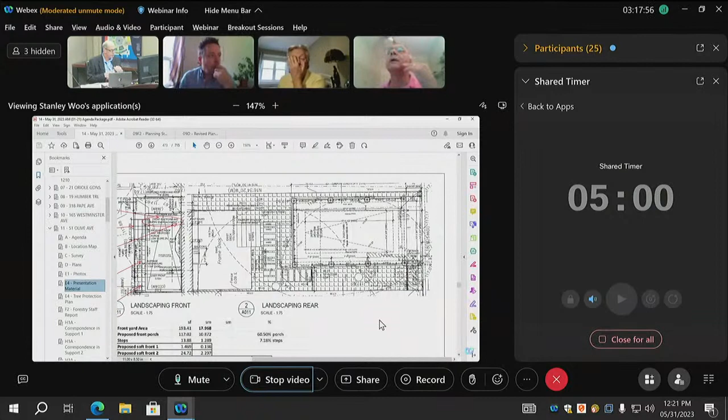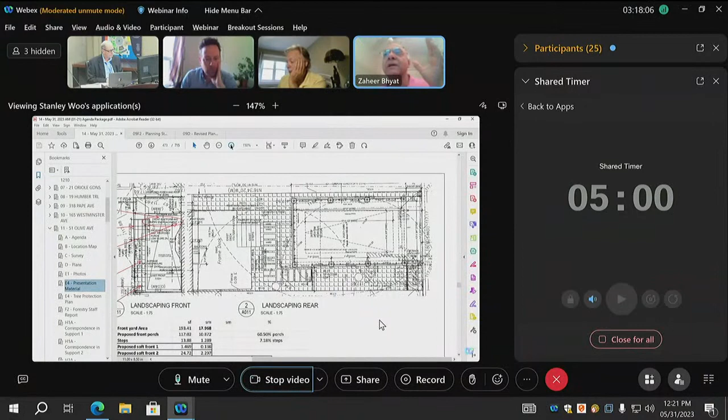It says porous. Wonderful. And just the other question is, in that same diagram, you've got all these little squares. I'm not quite sure what that indicates. Is that soft landscaping that you've got? Yeah, that's a really poor choice of hatching pattern, but that is soft landscaping, yes. Okay, thank you.

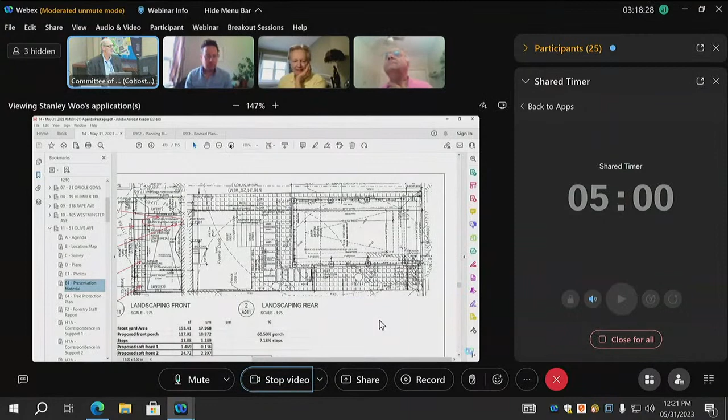Very good. All right. No further questions. Let's take this into committee. Moving to, if anyone has a motion, they can carry forward with it. Mr. Clay, go ahead. Sure, Chair, I'm happy to do this one.

I think this is a very straightforward application. It's a relatively modest addition off to the rear. I think we've had a good discussion about the landscaping provisions of the application. They seem fine to me anyways. I do note that there's a balcony off the rear, but it's a Juliet, so it doesn't really need screening. I think this is a supportable application. I'm prepared to move approval, subject to forestry condition number 2.

Thank you very much. That is seconded, Mr. Bhyat. It is moved and seconded to approve. Those in favor, please. Just a second, Mr. Bhyat. Okay, there we are. Those in favor, please, show of hands. Very good. That motion is carried by a unanimous vote.

The application is approved. Number 12 is 226 Christie Street. We have the materials submitted. Support correspondence from 42 Yarmouth, 42C Yarmouth, and 230 Christie. Correspondence opposing from 247 Christie.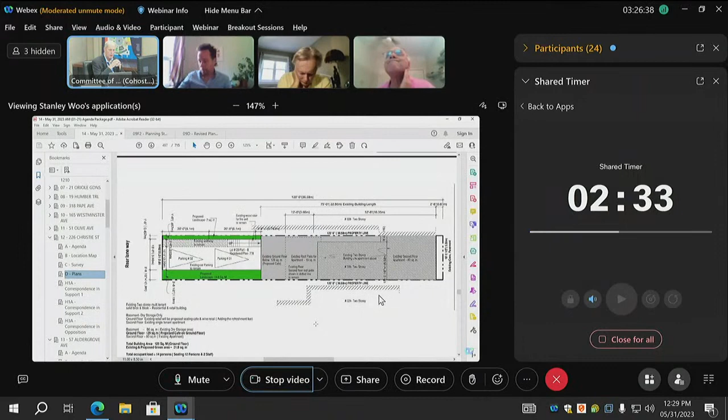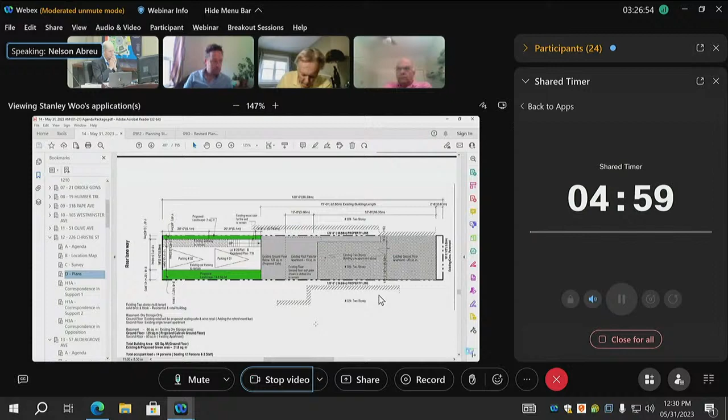Thank you very much, Mr. Wang, I appreciate your comments and concerns. We actually have a very good understanding of who our customer is. We've been in business for 18 years, importing and distributing wines in the province. We are licensed to distribute in the province. We know our customers extremely well. They are mature adults. Our product does not appeal to young people. It is a product that is enjoyed with food. Quite simply, we are not a bar, we are not a pub.

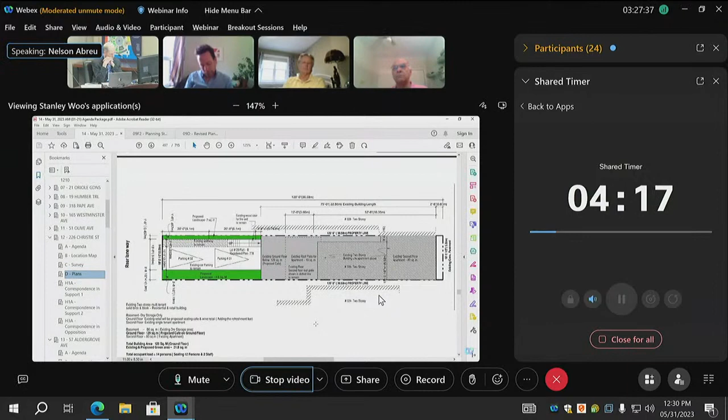We are not a full-scale restaurant even. We are serving light snacks for people to come in and experience some wines that they cannot get in the general retail system. And our neighborhood is suffering, to be quite honest, from a retail landscape—50% of the storefronts in our neighborhood are shut down.

If they were all filled, it would be glorious. We would have a beautiful neighborhood, and I welcome that to happen. Our shop that is going to handle a couple of customers at a time, or a dozen an hour, I don't see it having an impact on any noise. We have no exterior operations. My mother lives on the 2nd floor still today. She's the owner of the building, and I don't plan on disturbing her one bit. That would defeat the entire purpose of starting this project. But I understand your comments, and I would love to meet you in person and chat further if you like.

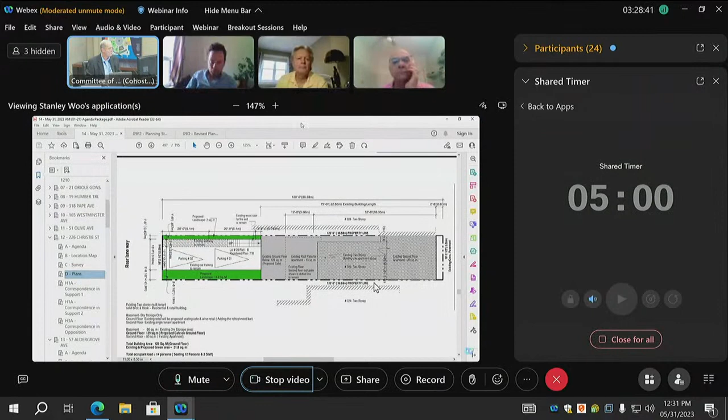Thank you very much. Panel members, questions for the agent? Not hearing any. Let's go then into committee, and we can move to a motion on this application. Anyone ready with a motion? Mr. Bhyat, go ahead.

Thank you, Chair. I think this is a very reasonable application. It's a very technical one in some senses. And I think the fact that it's on Christie, a busy street and part of the neighborhood economic activity zone, the idea of somebody trying to revitalize a neighborhood through the efforts of expanding their business, I think is quite commendable. So I have no concerns about this particular application. I'd be happy to move a motion to approve, and there are no conditions attached.

Thank you. Is there a second? It is seconded, Mr. Reid. Moved and seconded to approve. Those in favor, please, show of hands. That vote is unanimous. To carry the motion, the application is approved. Thank you.

Number 13 is 57 Aldergrove Avenue. On this application before us, we have simply the materials submitted at time of application and 4 photographs, trees on the property. Let's have the agent join us, please.

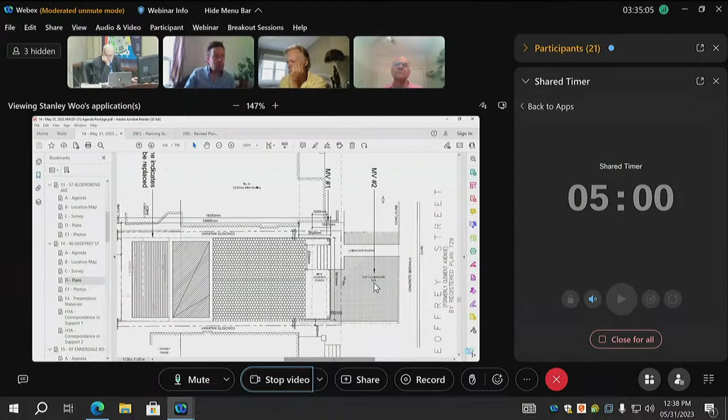the required percentage. For the rear, again, the additions that were kind of ad hoc put on the structure originally are being removed, but we're maintaining that back line. We're not wishing to extend any further into the backyard to max out that distance. And then with a very modest 7-foot deck coming off of that to get to the backyard, we're kind of left with the space that's there. There's a garage that takes up quite a bit, so barring demolishing part of that or removing all of the deck, we thought we would improve that backyard condition as best we could, though realizing we still are a bit deficient, but our intent is certainly to make it better than it is currently. Thank you.

Other questions, panel? No. Sorry, Chair, if I may.

Go ahead. I was just looking at the site plan. There's an area identified as soft landscaping, and just below that, landscape pavers. Are those pavers existing, or are they proposed?

Those would be proposed. Currently there's an image in the supporting document showing basically all concrete pavers and a wood deck on concrete pavers, but we're going to remove that condition. We still need some kind of path to get to the garage.

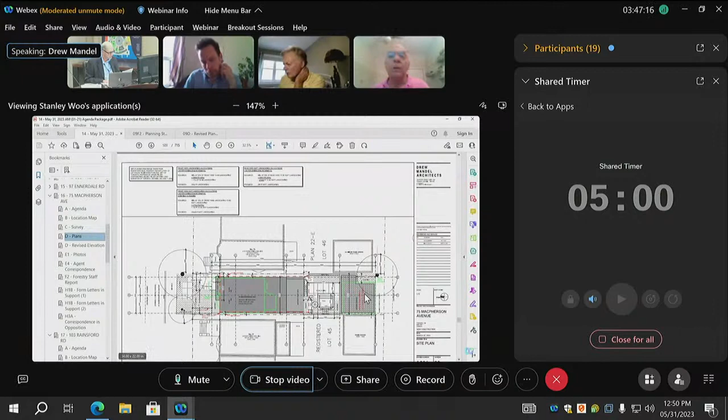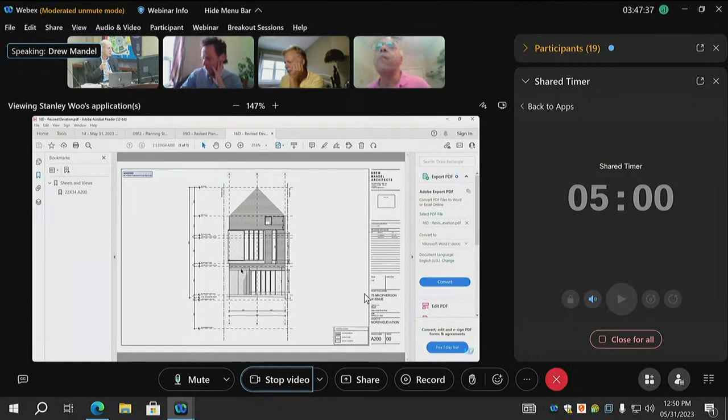My question relates to the garage roof. I wonder if you could explain what use, if any, is planned for the garage roof. Yes, this was actually the source of a misunderstanding with one of the neighbors that we resolved to the neighbor's satisfaction. The only planned use for the garage roof is for potential green roof planting. There's no occupation or entertaining or storage of any materials on that roof, just a roof.

Thank you very much. Would I access the garage roof by ladder or by staircase? No, sorry, pardon me. There's no staircase provided. Access would only be with a ladder for maintenance purposes. Very good. Thank you.

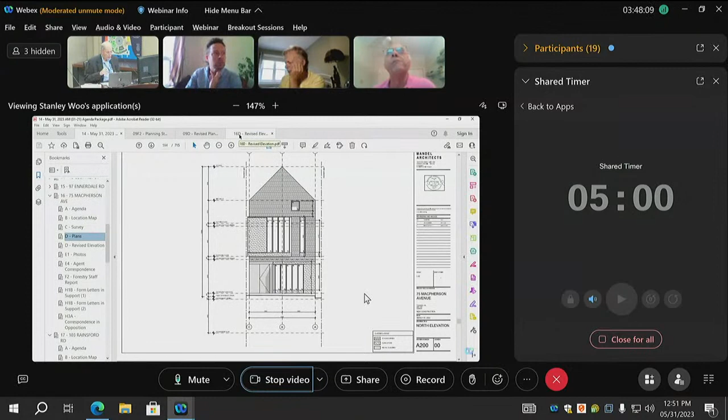Let's go forward, panel. Take it into committee and move to a motion. Mr. Reed, please. Thanks, Chair. I think this is a very reasonable and restrained application for a new build, especially. The variances are minor, and it's really not out of keeping at all with the existing built form in the area. So I'm happy to move approval subject to urban forestry condition 1 and 2.

Thank you. That is seconded by Mr. Bhyat. Moved and seconded approval. Those in favor, please show hands. That motion is carried by a unanimous vote, and the application is approved.

Number 17 is 103 Rainsford.

We're looking at the submitted materials. There's a photograph of trees on the property, and we do have a staff report from Urban Forestry.

Agent, please join us. Yes, hello there. My name is Peter Kerfurst, and I am the agent for the property. Hello, good afternoon.

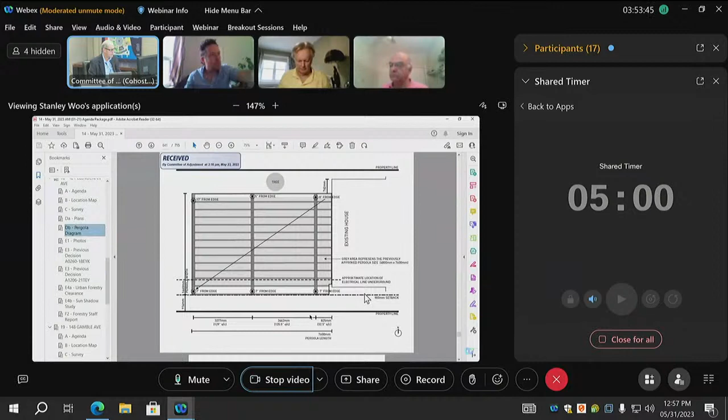Okay, great, thank you. And Mr. Picken, tell me please, is the pergola already partially constructed or not constructed at all? Actually, it's completely constructed, it is existing. Yeah, you can actually see it in the photo there.

Okay, so let's just check the purpose, we are in fact being asked to legalize. This was built without permit, correct? No, it was constructed after the committee's original decision, which included the rear shed, and the rear shed was built on permit. So the original application included the rear shed.

Through the chair, let me just double check if there's a violation in the system. I don't think there is a violation in the system. So in that case, we could just amend the purpose. Oh, it does say 'to permit' - so to permit, it would be to permit the pergola.

So I... I was just going to say, I had a building permit, and then I'm going back to the committee of adjustments at the request of the permit officer. It was due to get closed out, and then he said, 'Oh, this is just a little too wide for what I can sign off on, can you go back to committee?'

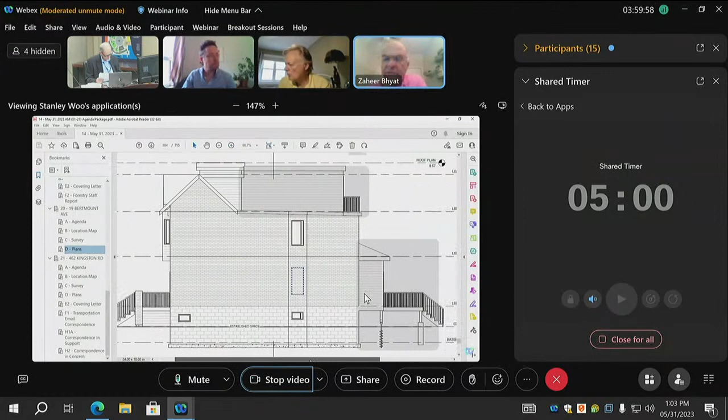Mr. Bhyat: Just a quick one, Chair. With regard to the balcony on the third floor, I can't quite notice the height, but I'm going to ask if it's okay on the south and north sides of the balcony to add privacy screening up to 1.5 meters. That's no problem. Thank you.

Okay, then let's go to a motion. Mr. Bhyat: I'd like to move a motion to approve. It's a very straightforward application, and the only condition I would add is the privacy screening on the third floor balcony on the north and south sides.

That is seconded, Mr. Reed. It is therefore moved and seconded to approve. Those in favor, show hands, please. That vote carries the motion. The application is approved.

Number 21 is the last application on this segment of the agenda, 462 Kingston Road. We have before us material submitted, a cover letter from the agent, correspondence from Transportation Engineering, support from 466 Kingston Road, and interest or concern expressed by 460 Kingston Road.